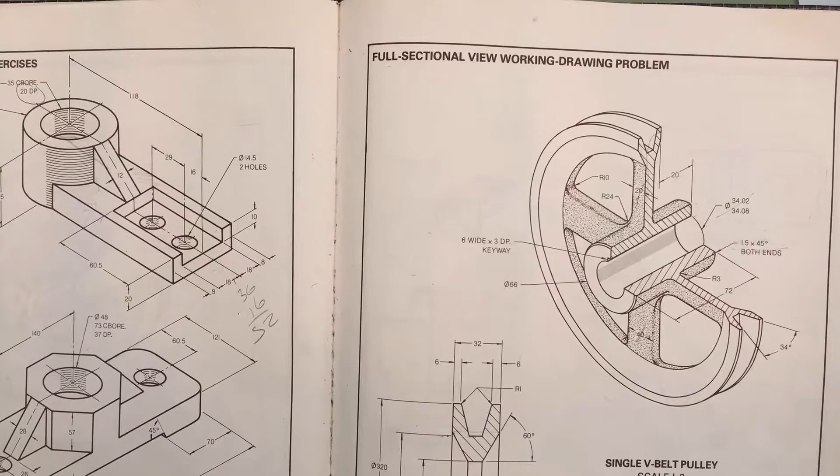So we're going to talk about the different objects that are going to be required in this next assignment, if you've got the PDF in front of you. With these, you actually just need two views for each of these four objects we're going to be looking at here. One of them I discussed this morning, the feed block on page 173. And we'll look at some of the other objects here and what has to be done with them.

Okay, so this is one that I looked at earlier with you guys, our little sketch here about what that's going to be like with the countersink and the counterbore. So that's one where we're going to be providing a top view, seen from above, so you can see this slot goes all the way down.

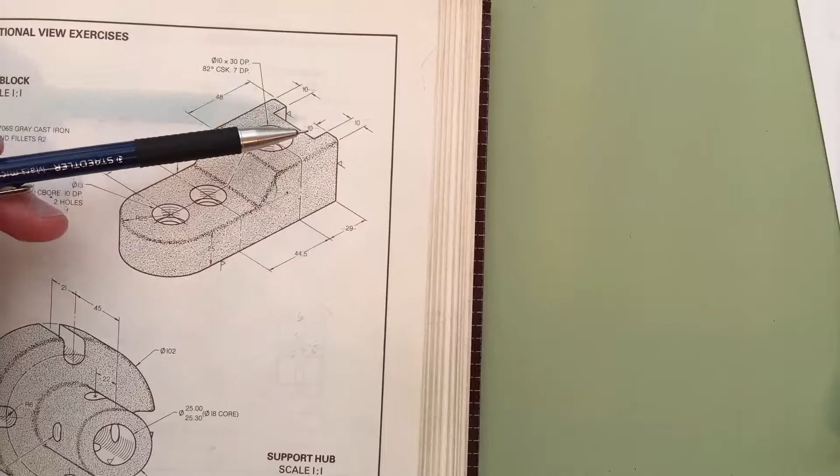And that's it. Now, some of these faces, you're going to see this funny little flag symbol. You won't have to redraw this flag symbol, but what that means is it's a finished face, like it's a polished face. It's been machined, so it's super smooth. So these things can sit right up against a very polished or well machined face, and it mates up against it without any imperfections.

So the feed block is pretty straightforward. Let's go on and look at the single pulley.

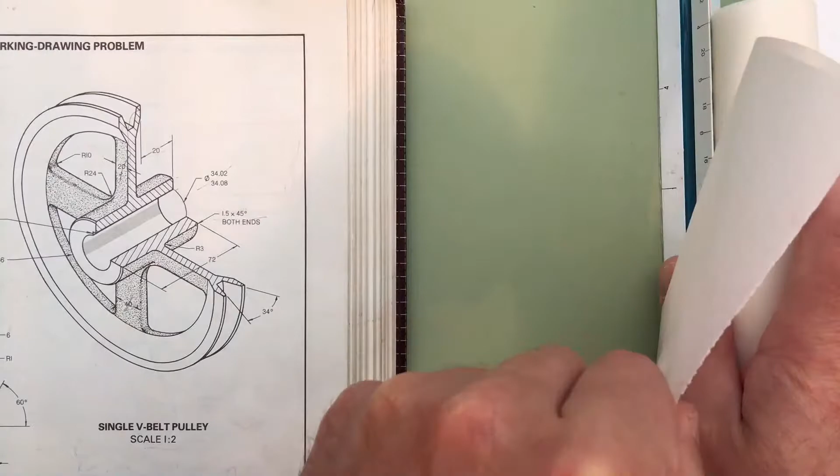Okay, so this is the one that everybody gets wrong. And remember what I said earlier about that if the students don't get it right, it's the instructor's fault. I always tell my kids, if anything goes wrong with you in life, just remember, blame your parents. It's their fault. Okay.

So this goes right back to the question we had right at the beginning of this thing. Why don't we show the spoke sectioned? So we're going to be doing a section of this thing. And that again is just so we don't give the erroneous impression from the section that the spoke is continuous all the way around. Here we've got actual, significant gaps in between the spokes.

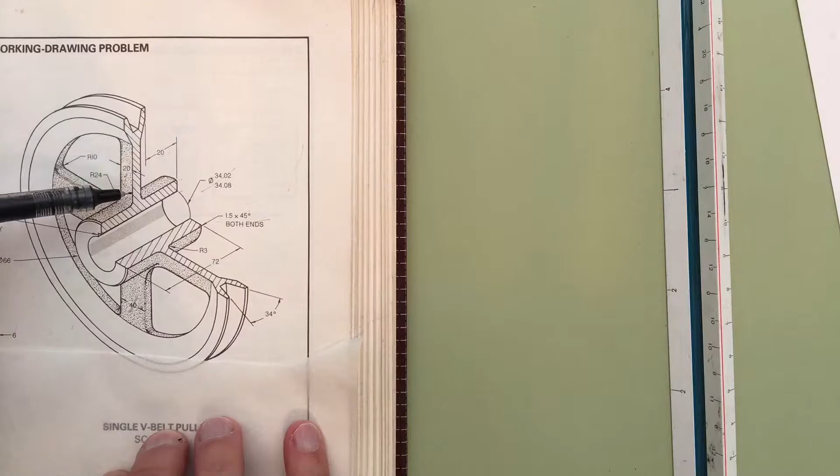So this part is going to be not shown sectioned. Now, they've got a little detail view on the end here about how this rim is to be drawn. You don't need to draw the rim detail. This is just to help you draw it when you do the section through the pulley. And we're not going to be doing this cutaway either. You're just going to do a straight section right through the middle of it.

So what that's going to look like is we're going to have the rim, and then you're going to transition to the spoke. And then you've got your hub. The hub has a keyway in it, so keep in mind that you're going to have to draw that slot for the keyway. And then we go to the other side of the hole, back to the other side, spoke on the other side.

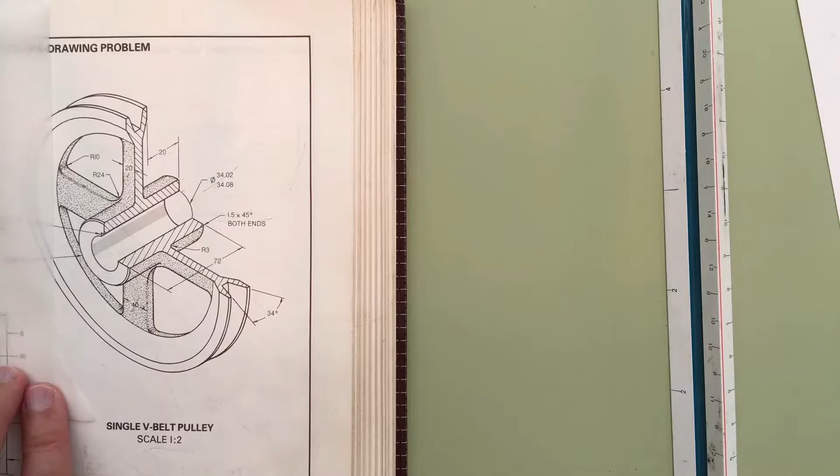Yes. Yeah, I had the Word document obscuring my live stream, so I couldn't see that I had gone off screen here. So, anyways, yeah, the point being, so you've got your keyway here, so you've got your opening.

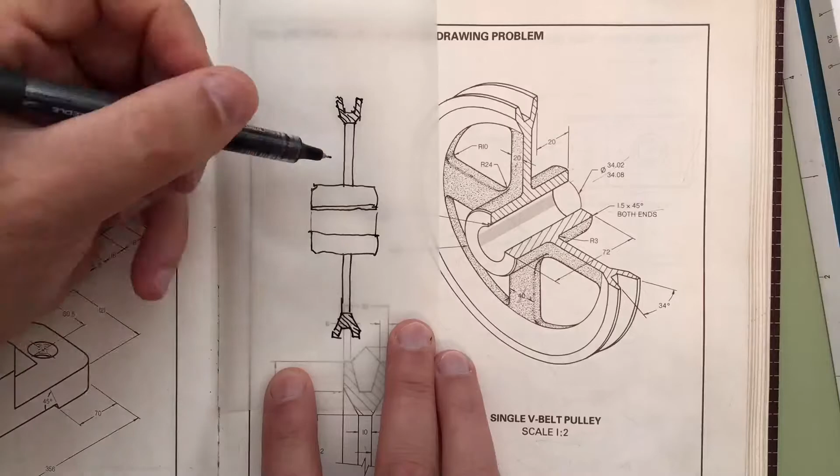And so your section through this thing is going to show the rim and the hub sectioned, but not the spokes. So in here, whatever the size of your keyway is, it's going to make the material a little bit thinner on one side of the hub compared to the other, of course. So you end up with something like this, and there's your center line that goes right through that thing.

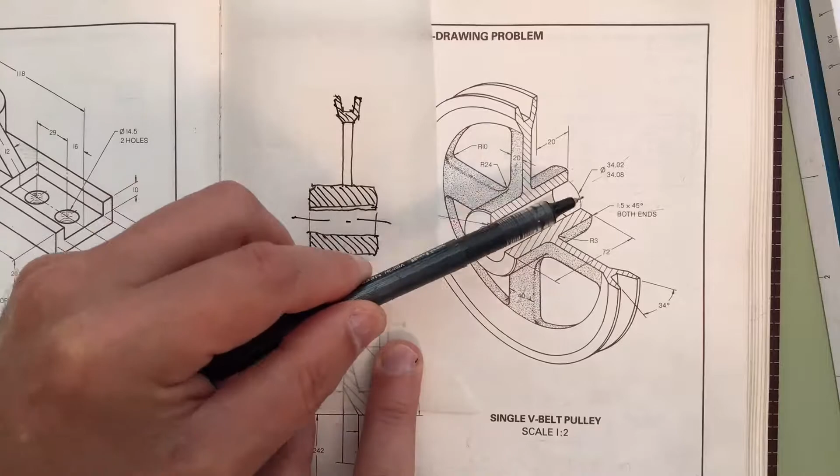Showing them but not sectioned. So again, the reason that it's not being sectioned through, even though our section line is following exactly what you see here in the cutaway view, is the convention of showing that this spoke is not continuous. Like this isn't a solid thin flange all the way around. There are holes in it, and in fact the majority of the center part of the wheel here is air, not material. So hence this representation of it. And yeah, go ahead.

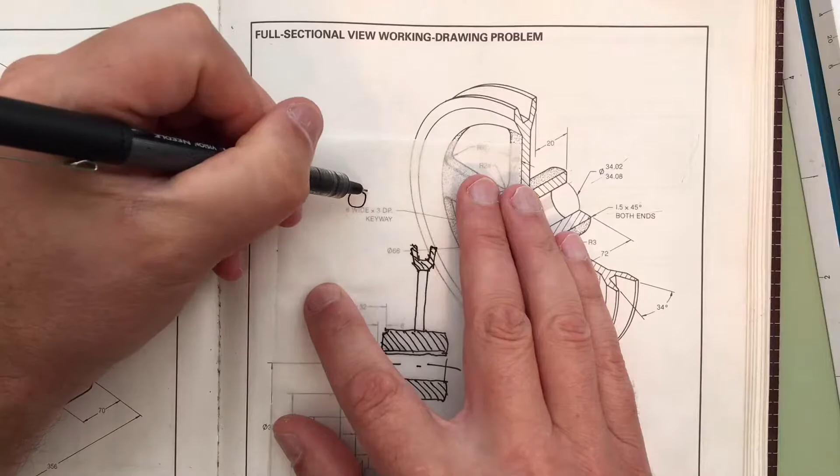Anytime there's a gap of material inside, that's the trigger right there. So unless this was a solid flange all the way around, you'd still use this convention. If you had a different situation here, let me draw a very simple top view—there's a hub and then a rim around the outside.

Even if we had small little holes, like just almost little gaps, we'd still use that same convention where we show it discontinuous, because we want to tell someone: there are some holes around this thing radially, this isn't solid material all the way around. So in a sense, your section is a lie—it's not really showing it accurately.

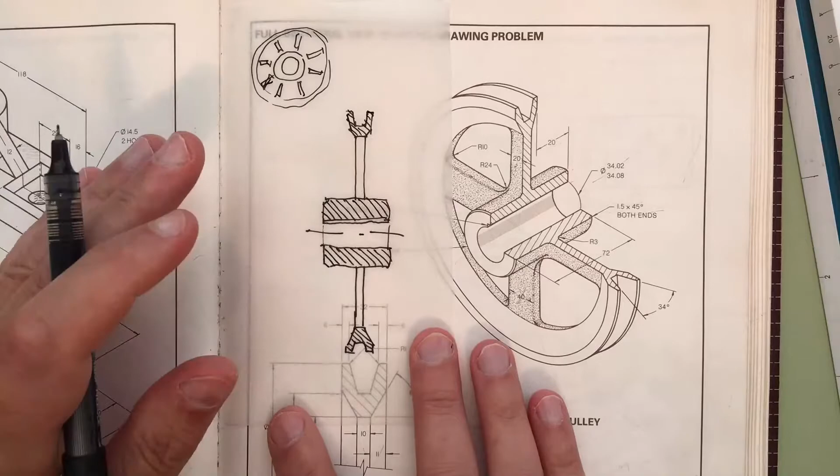It's like you went up to your parents and said, I want a motorbike. And your parent turns around and says, you'll die if you get one. No, it's a lie—well, maybe it isn't, but that's because I'm a parent, right? It's like I got a kid who wants a motorbike really bad. He's like, I want to start with a 600cc bike. And I'm like, you're going to die, dude. You are going to die.

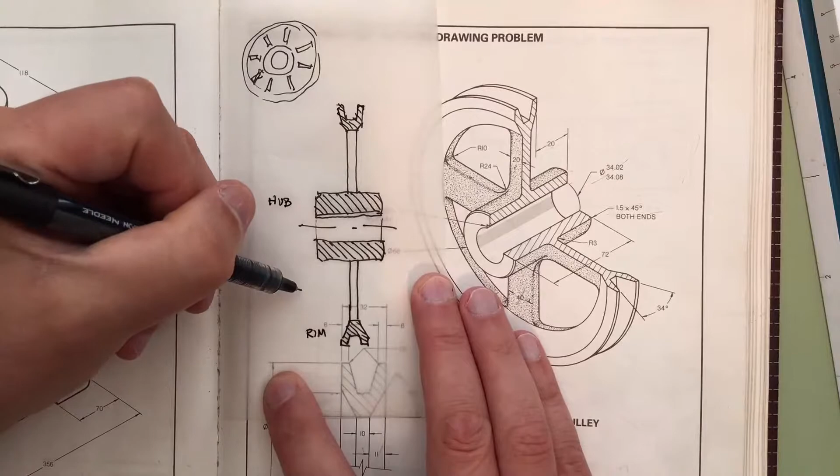We do this because we're trying to get clarity on this thing, which is that this piece of material between the rim and the hub, the spoke or web that's in between, is not solid material all the way around.

Anytime there's a bit of a gap—and it's a bit of a call—but most people sectioning through this, even through a wheel like this where you can see 80% of the spoke area is solid, it's only like 10-20% of the spoke area that's air, but nonetheless we'd still use the same presentation. It's designed to say this is a weaker or background thing—it's discontinuous, but this is continuous.

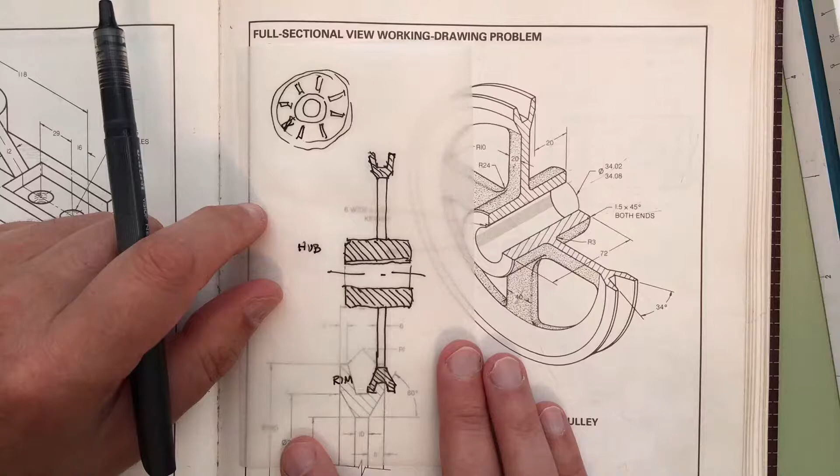Like this thing here. I didn't maybe draw this quite correctly—if you were looking at it, there's a bit of a round here, or a fillet, I should say. It actually does this, and you would not see those bits of lines coming right down to the end. So when you guys draw this, you can see what you'd see. Let me draw that again: the spoke comes down, and when it hits the hub, it's going to round out, it's going to flare, and that's what you're going to see.

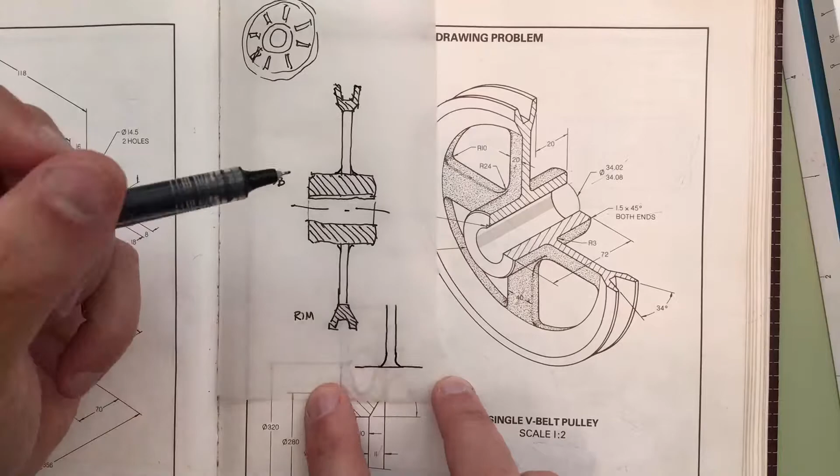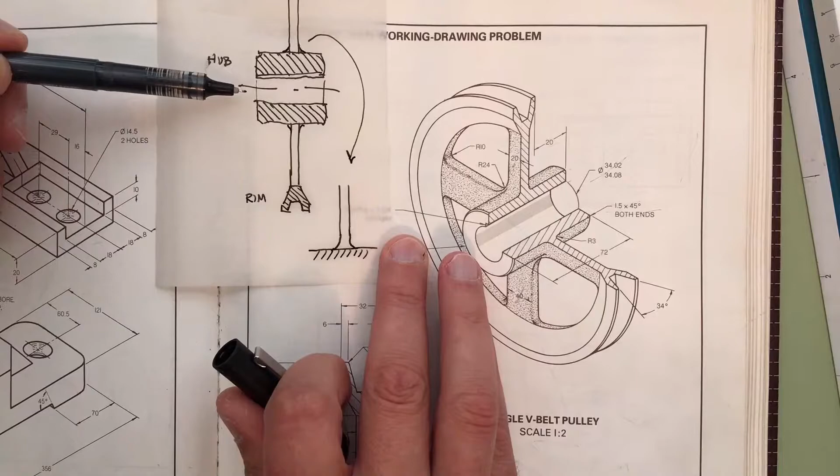And then sectioned material below that—that's this location here, which I'm drawing right there. That's right—solid material and not solid material, right? So that's the idea, so that when someone's viewing this drawing: from the edge of the hub to the edge of the rim, that's where the rim ends, and that's continuous all the way around. And this is the edge of the hub, which is continuous for 360 degrees. But in this zone between the hub and the rim, this is not continuous material, it's discontinuous material.

So here you have a discontinuity between this spoke and the next one because there are some gaps in the material. Now, some other stuff to talk about here—this isn't something in a textbook, but it's a tolerance.

This is something you'd still put into your notes. Here we've got a hole going through the hub, and this hole can be anywhere from 34.02 millimeters to 34.08 millimeters. Now what are you going to draw? Well, just draw 34, because there's no way anybody can see the difference between 34.02 and 34.08 anyway.

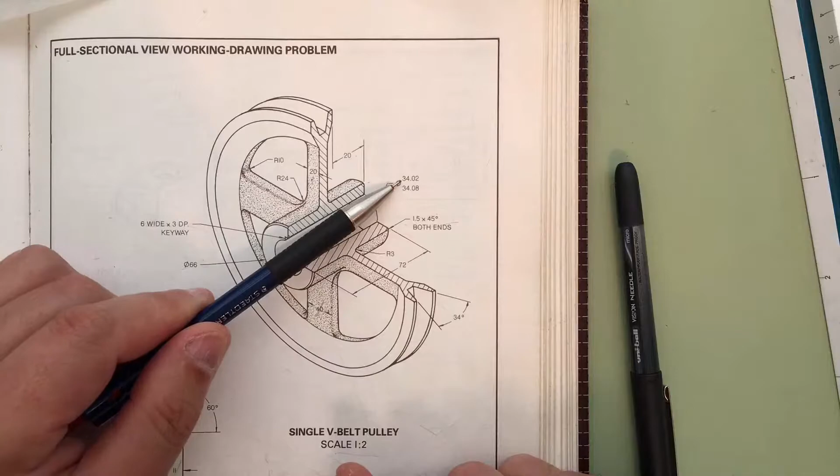So in real life, yeah, it's a tolerance. When these people are drilling this hole through, you want to make sure the 34 millimeter shaft can slide through without getting jammed. So the hole's got to be at least 34.02 so you can get the shaft through it. But if it's any larger than 34.08, it's going to be wobbly—it'll rattle inside because the hole's too big. So this tolerance, when you see two numbers like this, it just means make it anywhere from that size to that size, and somebody's got the machining to deal with that. So that's a tolerance.

So just draw it at 34 and then put these in your notes with the leader and with a little diameter symbol on it. Stack the numbers like you see here.

Now what we have on this thing is we have some rounds, and here we've got some fillets, an R3 fillet right here between the spoke and the hub.

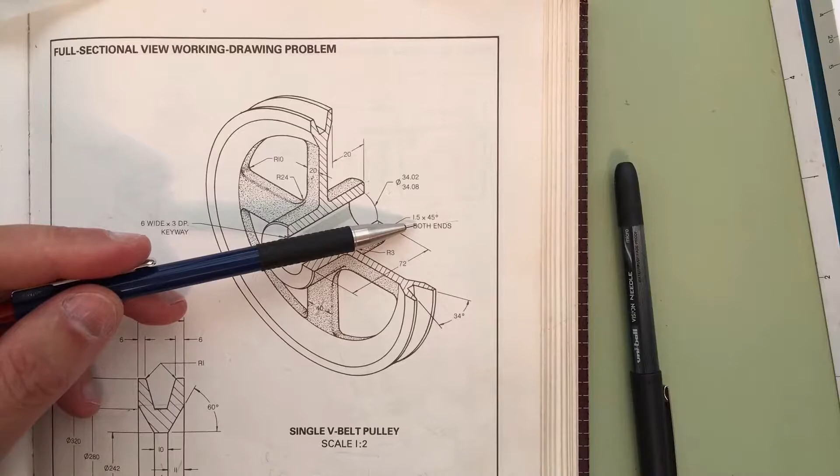But then we have what's called a chamfer. Here on the edge of the hub, I'll just draw this here at a larger scale. So a chamfer is where they grind off a flat face on the hub. Sectioned here, this is what it's going to be. That's our material.

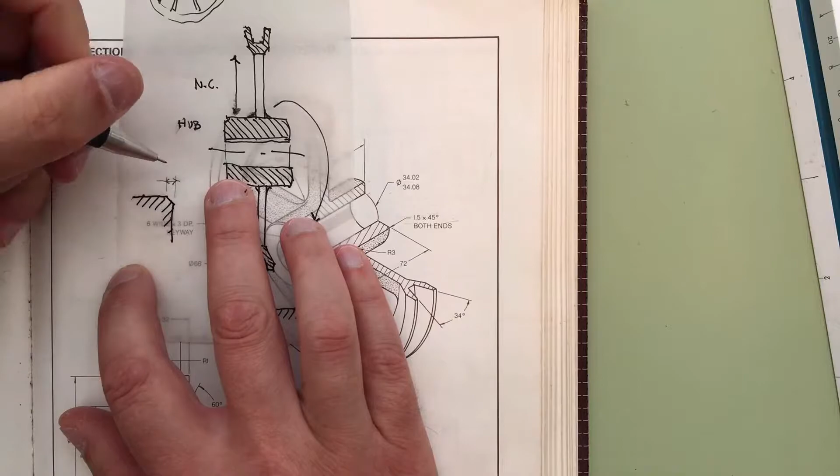When it says 1.5 by 45 degrees, it means the distance from the face of the object back to where the chamfer ends. So that distance right there is 1.5 millimeters, and it's 1.5 millimeters in both directions because it's a 45-degree angle. That is known as a chamfer. You won't have to note it as a chamfer—everybody in industry knows what it is, so no worries there.

Now here, where we have our spoke meeting the hub, this thing right here has a radius of 3.

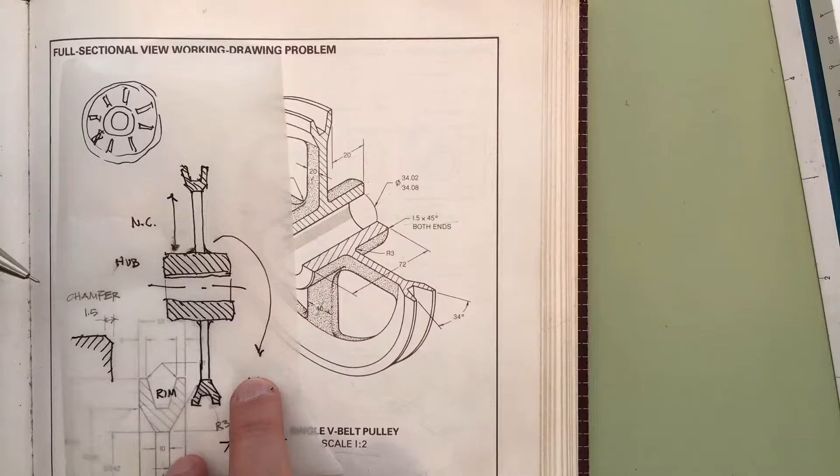This is a peril of being left-handed—you're always dragging your hand over your work and smudging it all the time. Yeah, it's a bit of a drag. So all you righties out there, thank the gods above that you are right-handed, because it can get to be a bit of a mess.

Okay, so that's that one. Just remember again that the spokes aren't continuous, and then you'll largely be on your way. Now the next ones are actually fairly straightforward.

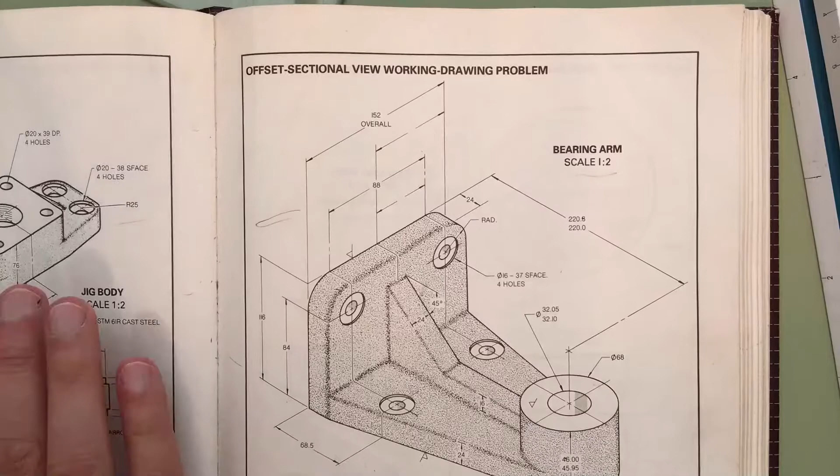They're sections now, so we'll talk about these, and we kind of hinted at some of the techniques or methodologies we're supposed to use. You can see someone here has already been sketching up the jog in a section. There's some other sketching going on here.

Okay, so it's the fixture frame. If there's a difference between a scale on the assignment and a scale in the textbook, use the scale in the assignment, because sometimes the scale in the assignment is different since we know it's not going to fit on a sheet as easily.

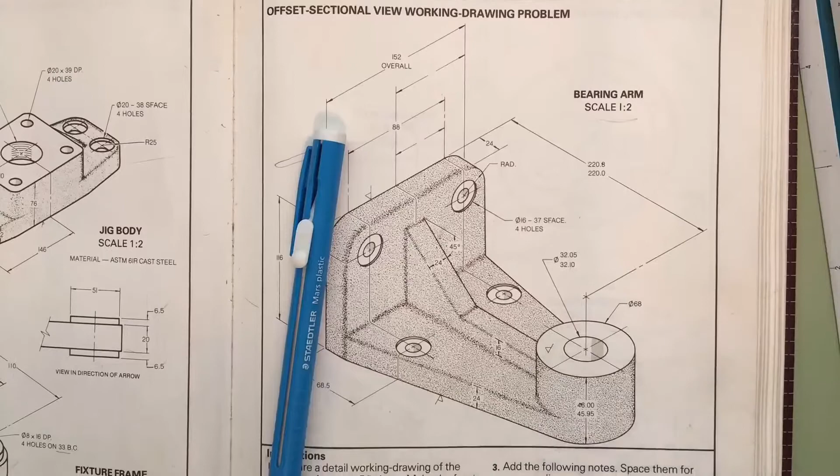Okay, so with this one here, we'll just talk about the strategy. It's just a top view and a section view, but there's some trickiness to this—it's tricksy, if you're a Gollum fan. Tricksy little hobbitses.

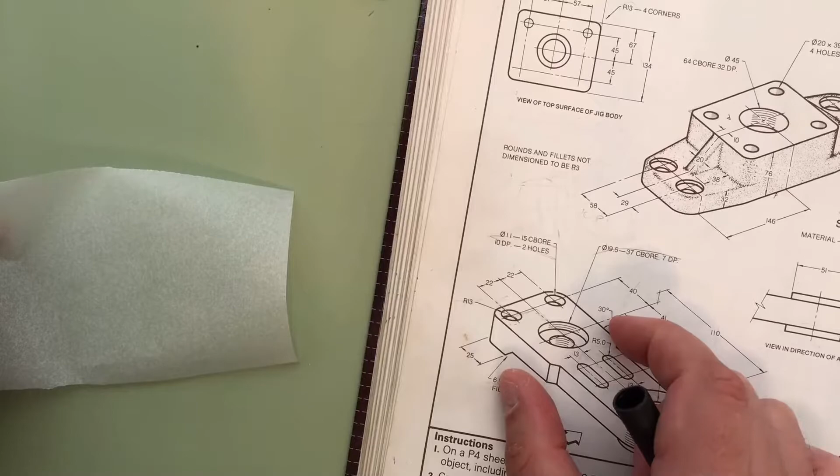Okay, so when we draw this fixture frame from above, you've got the radius here, and we've got some shoulders, but you will have to engineer what the full width of this is by doing the math. So we've got 44 mils between the center of these two holes, and then we've got a radius of 13, and you can see the arrow here.

Let me just get that up close to the camera so we can talk about it. The R13 down here in the corner—you can see how that arrow... Shoot, I just dropped my tracing paper and it unrolled all over the deck. Womp womp. So there, R13, it's pointing to the very ultimate outside of the object.

So that means we've got 13 mils added on both sides, so it's 26—2 times 13, 26 plus 44. So I think that's 70. 70 wide for that piece right there.

Okay, I'm just going to get that trace paper and roll it all up again here as I'm talking to you guys. So yeah, it makes sense to do the top view first, and then we'll come back and do the section view. So here I just got to use that drafting table to roll this stuff back up again.

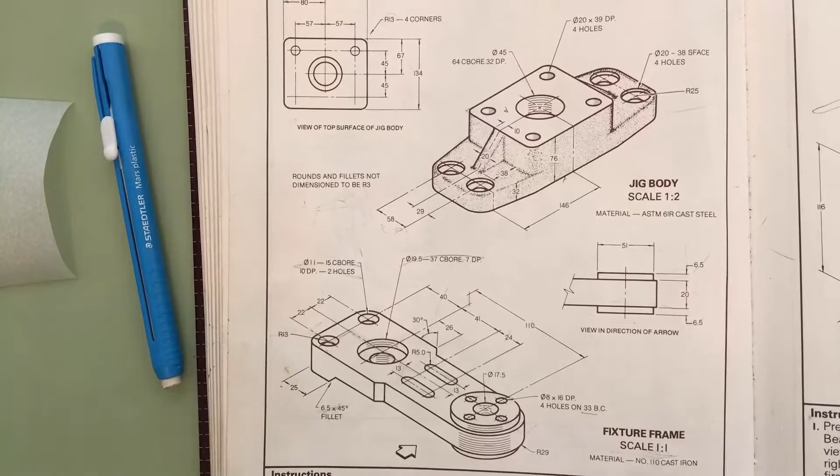Just trying to think if there's anything tricky about the top view. It's actually not the top view that's too difficult about this one—it's entirely the section. Oh yes, yeah, this is going to be a jogged section.

Oh no, guys! This isn't accounting. This is fun.

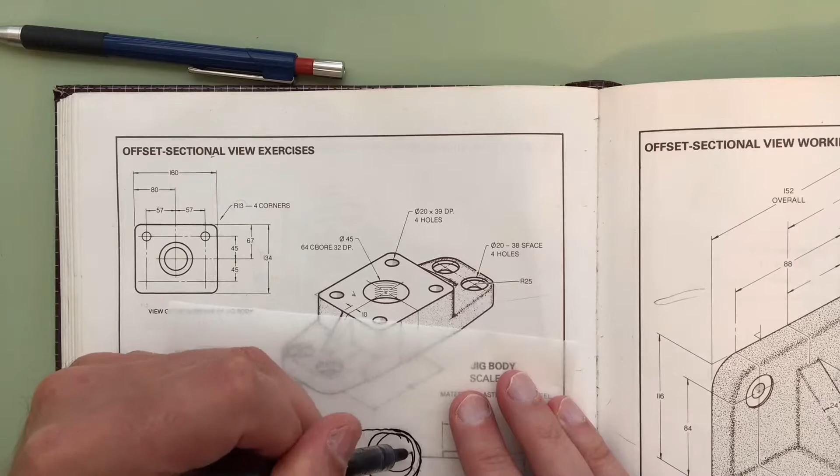Okay, let's do a quick top view sketch here so we can talk about the shape of this thing and how we will section it. I've got this completely wrong. So there's a second hole at the top, a hole in the middle, holes around the sides, and we've got the slot. Yeah, this is getting a bit of a cluster here.

So the section line is going to jog a bunch, but in the end this actually isn't going to be that serious a drafting exercise when we cut through it in section. I'm just looking for my colored pen so I can talk about the section line. I'll do it in red so it's easier to see.

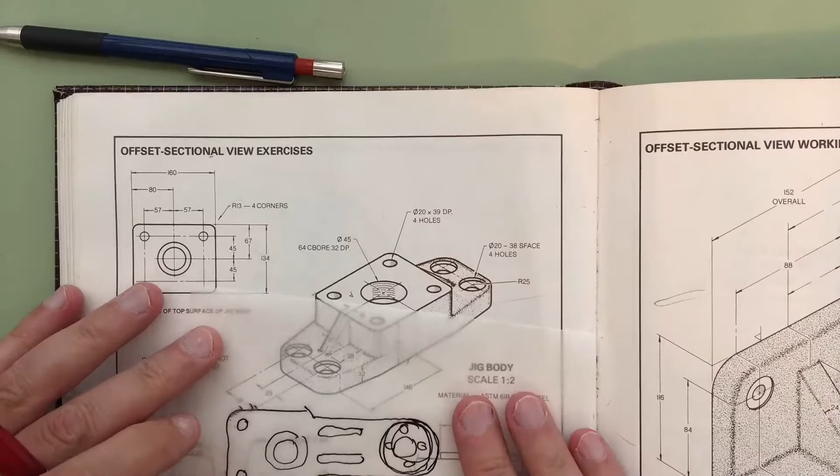So what's the section on this one going to do? What's the best way to go through the right end of this thing? Well, we'll just start in the middle and go right through the middle of this hole. So that's step one, pretty straightforward.

Now we want to catch one of these slots. It doesn't matter whether you go forwards or backwards, you just make sure you're looking in the same direction all the time. So I'm going to come back and go through this slot.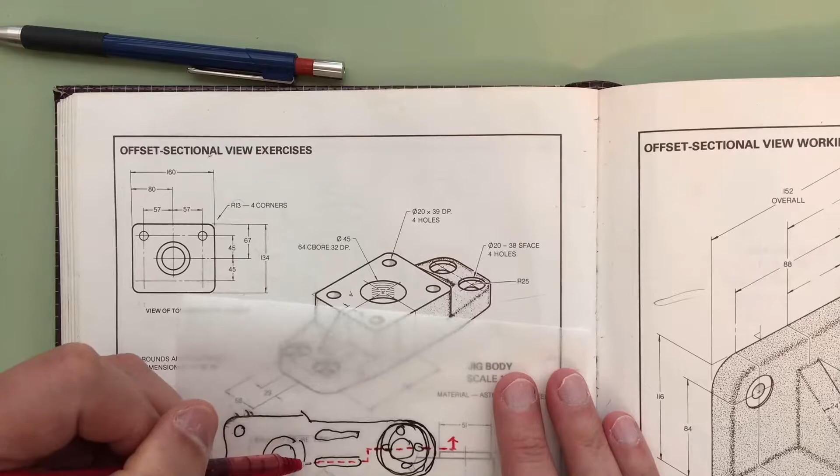Now when I get on the other side, I'm going to jog back over, go through the center of the hole, come back out, and go through the center of that hole. And that's the way we're going to draw the section. Now that looks torturous, but it's actually not that big a deal.

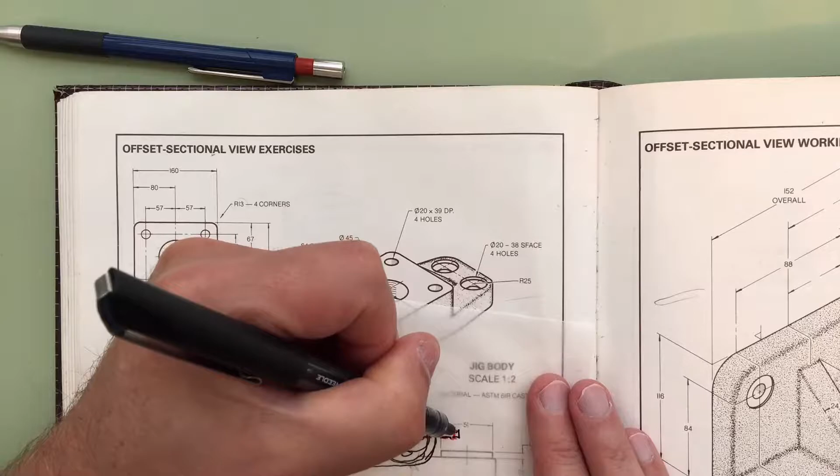Now for drawing the actual section line that's going to be on this thing, what would you do? Well, to be honest, I wouldn't draw this crazy section line, I wouldn't even bother with that. At the very least you would show that you're going through the section, or the middle of the object here, and then at the other end, when you come out the other side, that would be really considered sufficient. You wouldn't have to put any of that red business or anything else in the section line in there.

When the fabricator looks at your section and sees a hole here, a hole here, and a hole here, they're going to be like, yeah okay, I see what you did there. And that'll be totally good enough.

So let's look at the section. Here you can see this jogs downwards just at the very end here. And then this thing where the circle, the inner circle, raises up, it's proud of this plate above and below.

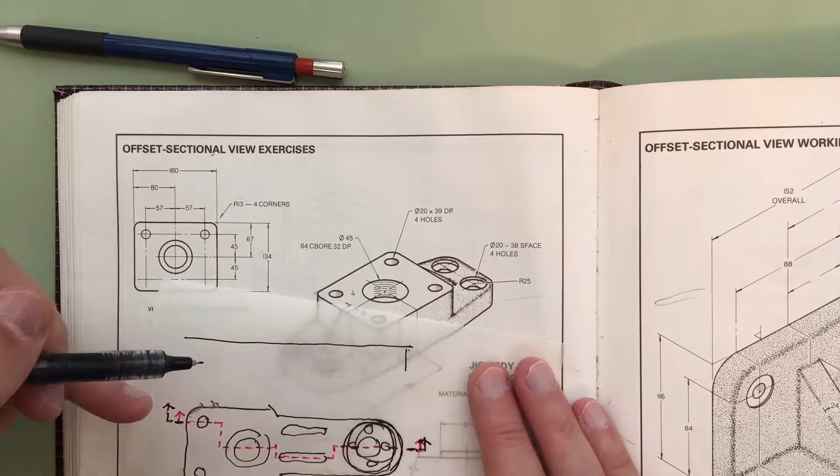Okay, so then we've got the little piece of the circle above and below.

Now I'll have another nice picture of this thing for you guys, which I'll stick in the ADT1 channel, so you'll be able to see all that. You can kind of see how this thing is built here, and so there's my resulting section that's going to be through it.

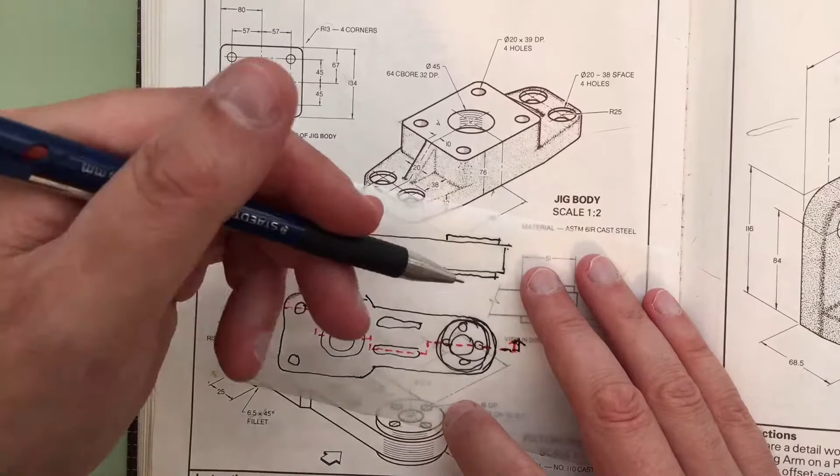So now we've got to talk about what am I going to show sectioned. What's happening here? Now this has almost kind of been drawn as a bit of a front view, so there's a couple of minor errors in it. So first of all, here we're going to transfer our slot up, and that's going to be drawn right through.

So in this one we've got our big hole in the middle, and then the two holes in the sides. So that hole goes all the way through. And I think these ones here, they're only 16 deep, so they don't go through. This one says diameter 17.5, and this center hole goes all the way through, but these four smaller ones do not. So you're going to see something, I don't know if I've got this quite right.

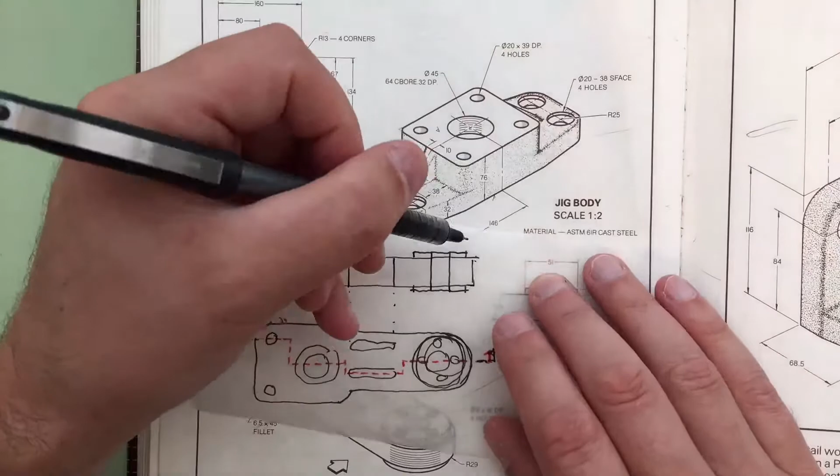Right, so these holes don't go through. Now this line that you see, I accidentally drew that as going through. It's not, so I'll fix that when I start doing my section line. And because I did it in ink, I can't erase this little piece of line right here under my pen, because that shouldn't be there.

Okay, coming back down, we've got our big spot face here. Not a spot face, probably a counterbore, 7 deep. And then we've got a hole that's 19.5. So that hole here goes all the way through and then steps back on each side. There's going to be something like that.

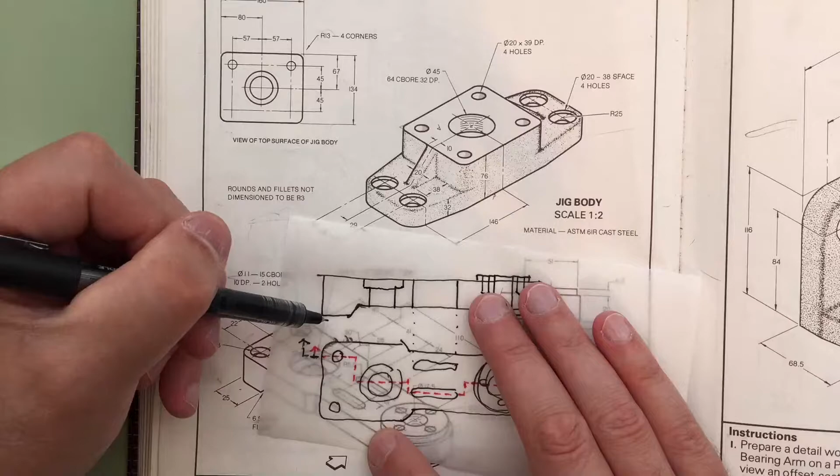And of course you see the object line going across. Then we're cutting through for a hole here, so it's got a counterbore 15 deep. And then diameter 11, 10 deep, 2 holes.

Counterbore 15 - oh I see, the counterbore is 10 deep, and there's 2 holes with a diameter of 11. So the hole goes all the way down, and then there is a 15 counterbore that's 10 deep, and the 2 holes are 11 diameter.

Sometimes the wording up here makes you wonder what's going on, but the counterbore has a depth, and the diameter is for the hole. So you've got two holes that are 11 diameter.

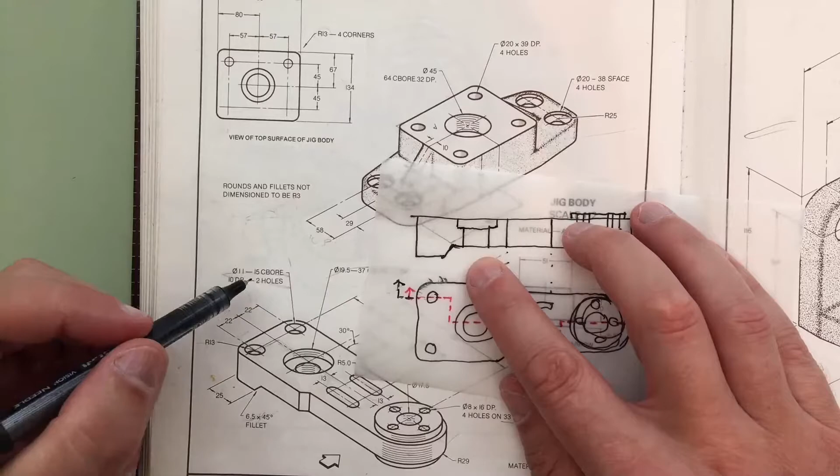I think sometimes they put the information here in a sort of backwards order on purpose so that you have to think about what's going on. So there's our hole, 15 wide, something like that. Don't forget the object line for the counterbore - you'll need that as well. So we're kind of sorted here.

So now I can start sectioning this. Now the next part of this that's going to be tricky is talking about the center lines.

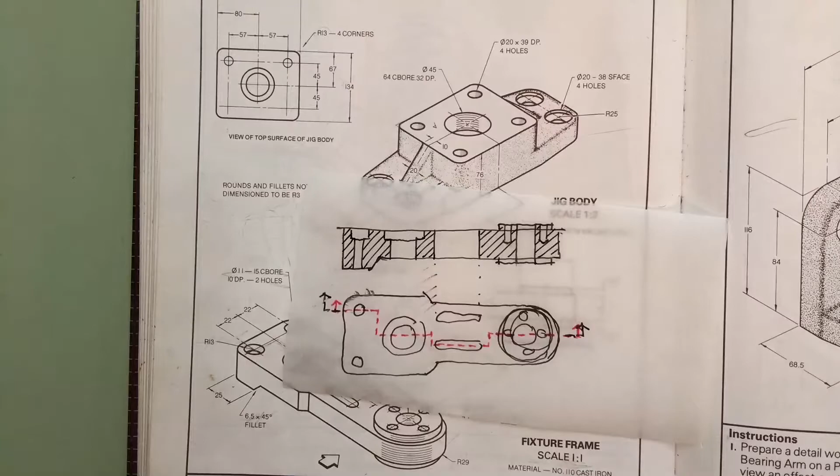These slots have half circles at the ends, so the slots end in a drilled hole. Typically when machining something like this, they'll drill the holes first, then use a router bit that will zip out all the material between those two holes, and that's how they create that slot. So when we're showing the slot in plan, it's going to have a series of center lines that get created.

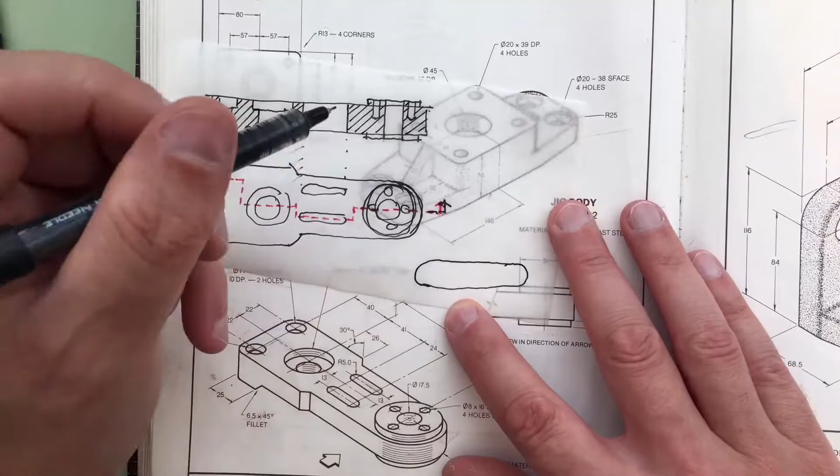I'm going to draw this a little bit larger because it's kind of small and messy. So there's my slot - this isn't really much better. I'm just blowing on it to dry it off as quickly as I can. We've got our center line for the holes that were at each end.

So we want to see a center line there vertically. This is a circular shape all the way around, so we really want to have center lines in the other quadrant as well. So we'd get my center line doing something like that. In the top view, you're going to see this slot with a center line running down the middle, and then a center line at the center of the hole on each end of the slot.

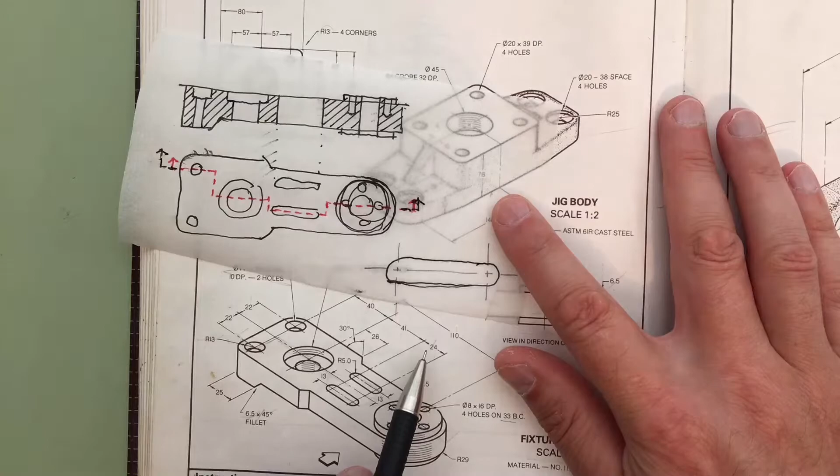Those numbers are dimensioned. Now when you're drawing this in section, these center lines that were here at the end of the slot will project upwards, and you'll see them in the section.

Well, what about this horizontal center line that goes through the middle of the slot? Will we see that in the section? No - we'll only see any of these center lines that can be projected upwards. And if possible, try to make it so that the dashes for the center lines line up. Not always possible, but you do what you can.

Now when we're cutting the section through here, there is a hole in the background, right? So we will need to see the hidden line for this hole here shown in the section. Yes.

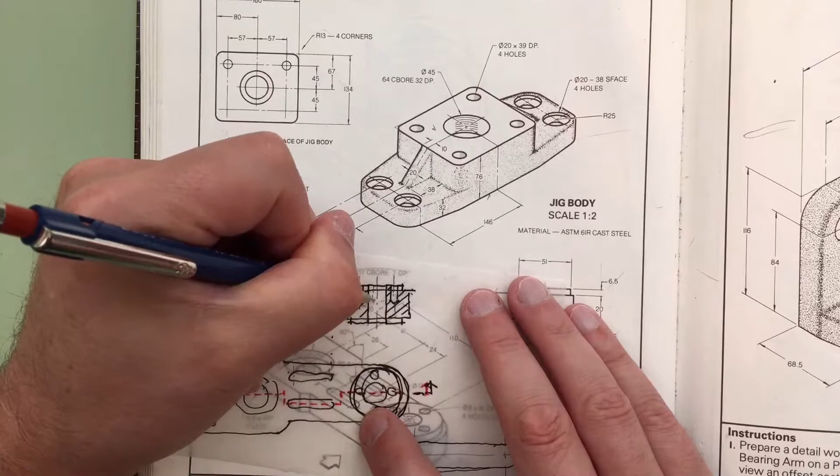Well then what about our major hole? Then you'd end up skipping the major hole - that would be the problem. So yeah, no, that's right. I mean, you're kind of damned if you do, damned if you don't here.

So the question was - this is just for the YouTube stream - why can't I take my section line, jog it here, come up and pick up this small hole? Because then you'd be forgetting the larger hole. So in this case, we keep the section line following the most significant bits of the geometry, and keep working our way across.

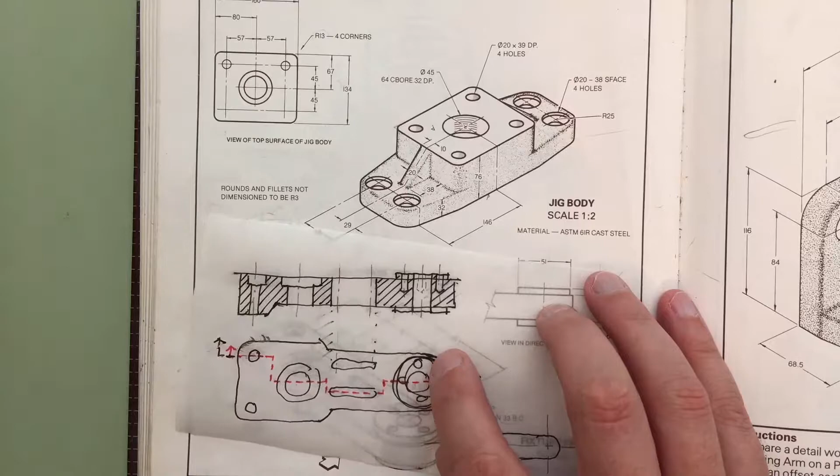So this is the tricky one. These center lines here coming up from the ends of the slot, center of holes, those are important. And then a hidden line for this recessed hole here. And so, I goofed up on this line - it shouldn't be here, this horizontal little piece. This should just all be one continuous bit of sectioned area there.

Object line going across. I'll put my red lines on there, and I'll continue with the sectioning here.

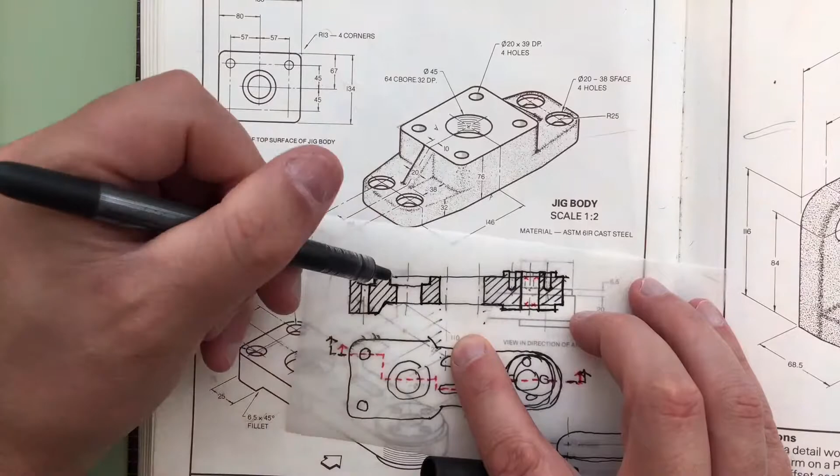In mechanical drawing, we don't show an extra heavy line for the sectioned area versus background lines. But as you're planning it out, this material hatch line would come down here like that. That is what your section should appear like.

So that just kind of walks you through this one. And we're cutting right through the middle of this thing.

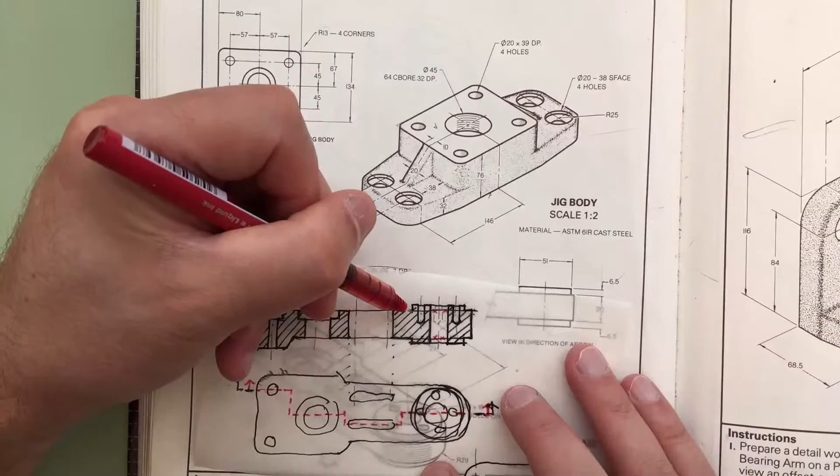This material steps up to that raised part in the middle. Would we see a hidden line in the background? We actually would. Going across here, this wouldn't be a solid line, it would be a hidden line from here to here, so you'd see a dashed line going across on each side. Not super critical if it's not there, the top view certainly illustrates what's going on.

Okay, I just got to go back and look at the assignment here and look at the next one. So, 183.

Okay, so the piece de resistance. This is a situation where you're going to be drawing a top view and the section. So the main thing that you want to make sure that you get correct on this assignment.

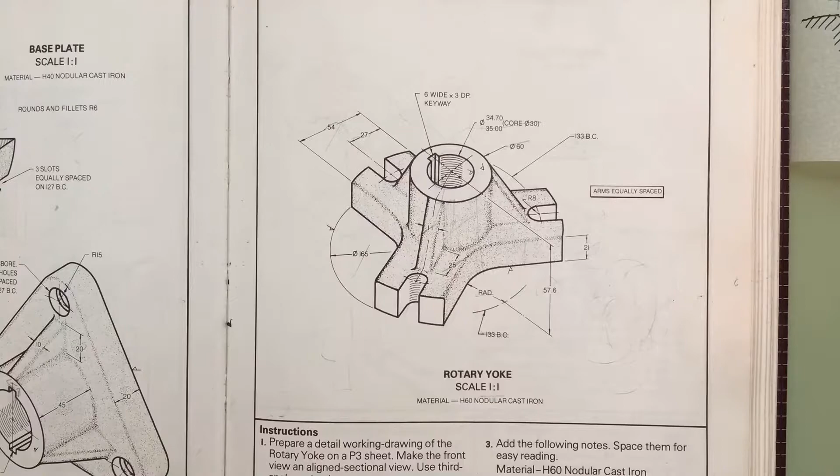So if I lay this out in plan, I'll just draw it very simplistically. Don't forget you've got your keyway here, or your key for the shaft. So I will draw that in here and make sure that that key is at the top of the view.

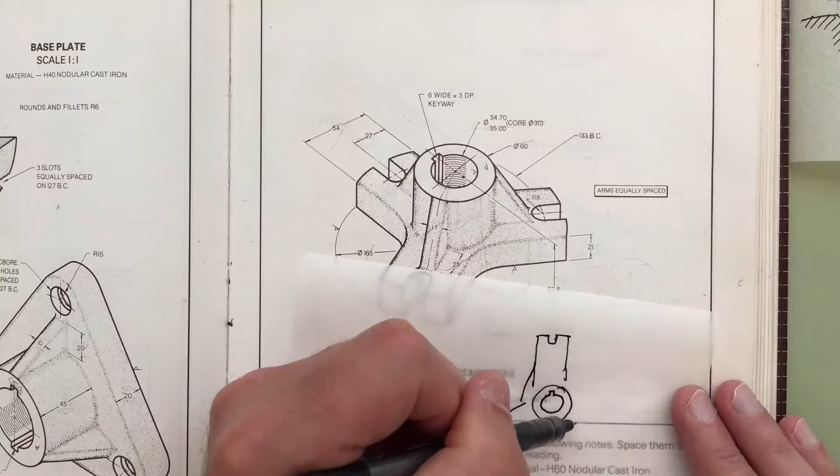Oh, it comes in closer. Okay, this is going to be a mess. Like, I mean, really a mess. Like, I should go back to kindergarten.

Okay, mostly what we're just talking about here is the sectioning strategy. So when we're talking about the section, we've got our keyway pointing up. So that's important, and our section is going to come right down this axis.

So I'm going to draw where we're actually going to draw the section line using the red ink. And it doesn't actually matter which direction you choose to cut the section in, but you just need to be consistent when you show the graphic for the section when you go down one of the other arms.

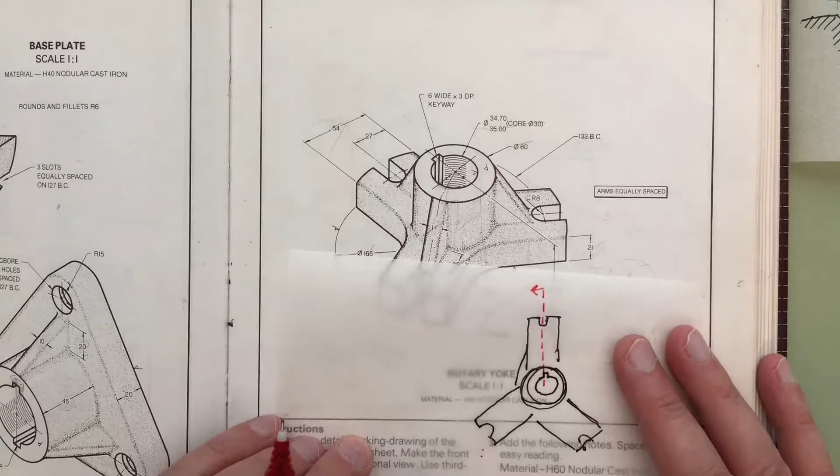Now, it doesn't even matter which arm you choose next. So if we decide that we want to look to the left with the section, well, you can come down the left arm or the right arm. All that matters is that whichever direction you choose to go, you make your section arrow point in the same direction.

So you want to go down the right one, fine. But if you want to go down the left one, that's fine too. But you just make sure that the arrow that you show at the end points in the same direction, whichever way you go.

Now, when you actually get to drawing this thing and showing where the section is, so I'm drawing that in black now, don't draw that section line going down the object itself. We don't want to hide anything. So just draw that section line outside, and that's good enough. So just make sure that your direction of your view is consistent.

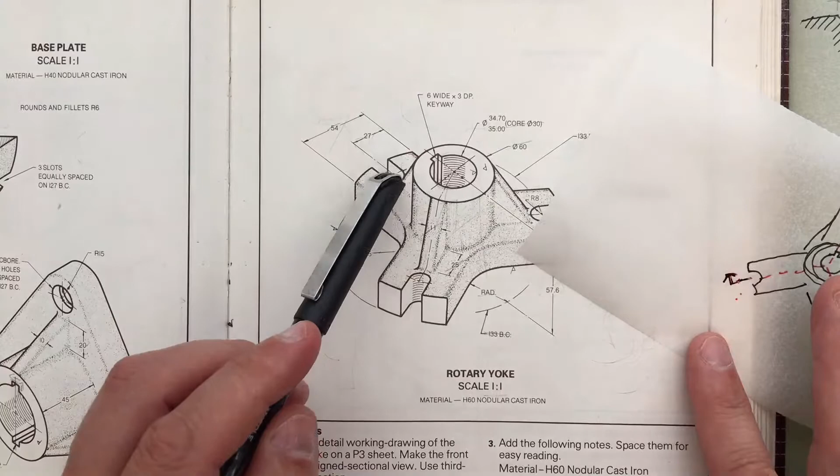So with this section, what's going to happen when we look at it is we're going to be cutting through the slot. So when we draw the section, make sure that your hub points towards the top view. So if I was looking in this direction, I'm looking at my section.

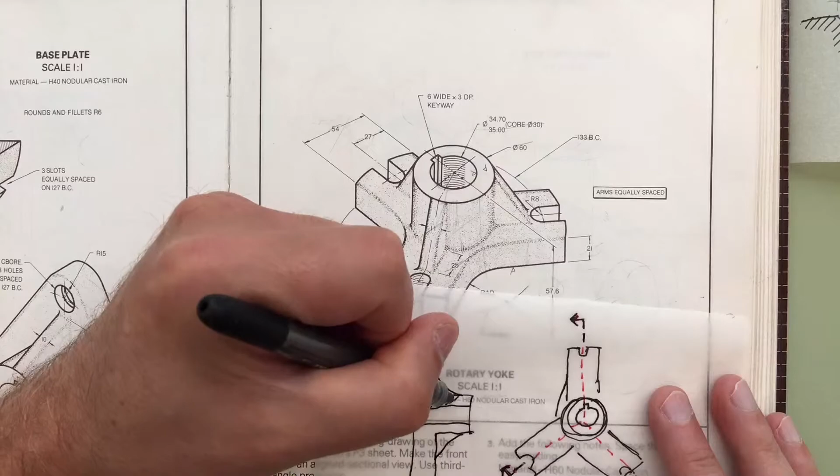Actually, no, this is actually going to be a really good learning point here. There's actually something wrong with this whole layout. Does anyone feel that disturbance in the force? What has the instructor done wrong? There is a mistake here. Now, is it in the section or is it in the top view? There is a mistake, it's a pretty straightforward one. It's actually...

No, it's not in the webbing actually. It's in... Well, this would give it away.

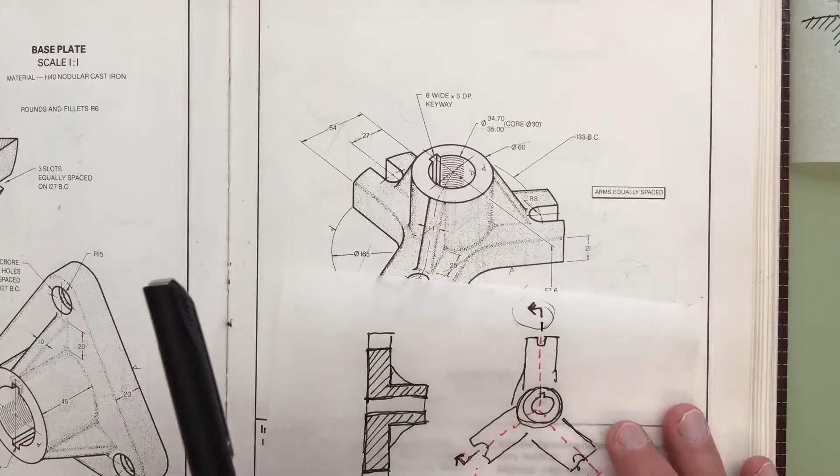No, it's more about the directionality of how I'm showing the section on the top view. They're pointing the wrong way. Yes, exactly. So if I've got my section view here, the section is actually looking in the opposite direction, because if you're really drawing this the way that I'm shown, I should have mirrored this so that the hub is pointing in the opposite direction. So really, this just needs to be mirrored and drawn in the opposite direction, like this.

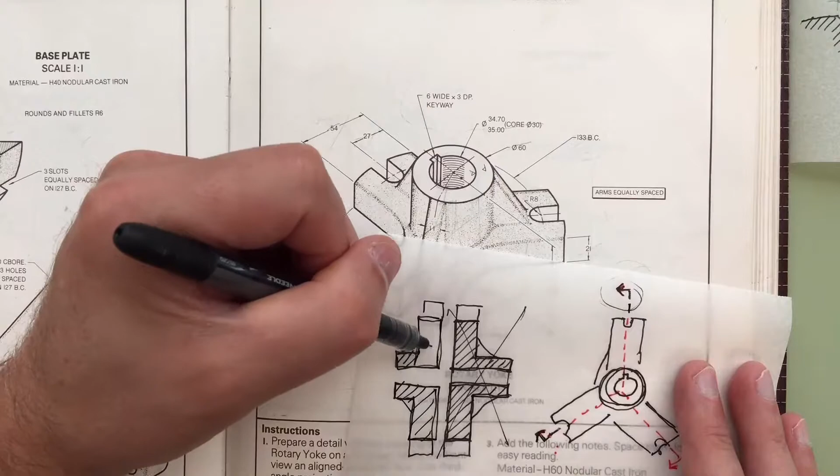But the problem with this is that we've got the other problem with the convention, which is that the hub in the section is pointing away from the top view.

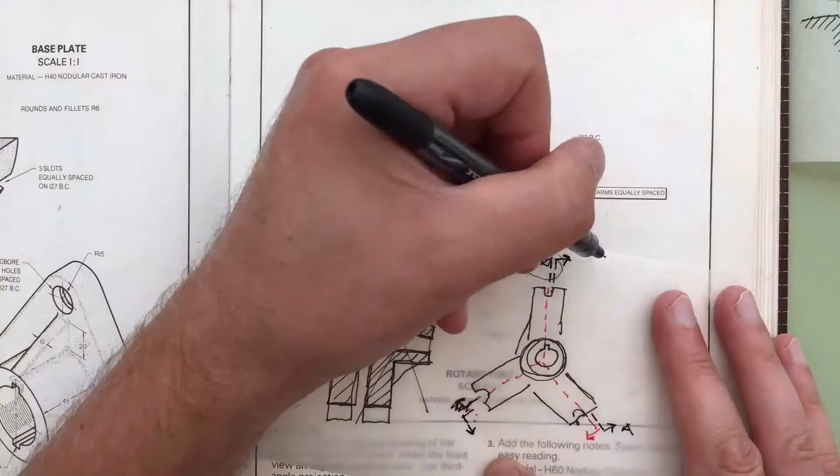So what should I have done here? I could have taken this view exactly. The best way to do this would have been to have this view, so in reality this is correct, and this would be wrong. We'd switch the arrows around, draw that section arrow looking the other way. I could switch the arrow here, do it there, or do it over here. Any one of these could draw the section, and then my hub in my section would be pointing towards my other view, which would actually be preferred.

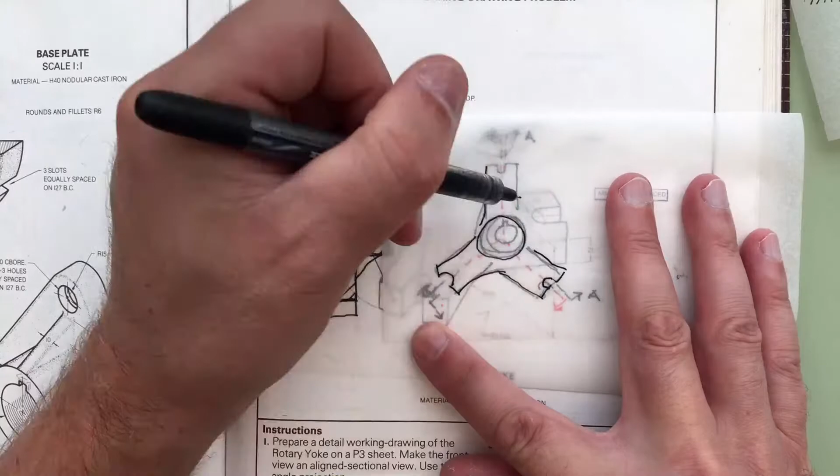Now the other correct way to set up your page here would be to have the top view of this thing. It's even nice to have the previous sketch that I had under there before, so I can work out some corrections as I go. You can see just why trace paper is so awesome, because you can see the previous stuff you did before and the mistakes you made, and then come back and sort it out. Just make those corrections as you're drawing through the trace paper. I love trace paper, I wish life was trace paper.

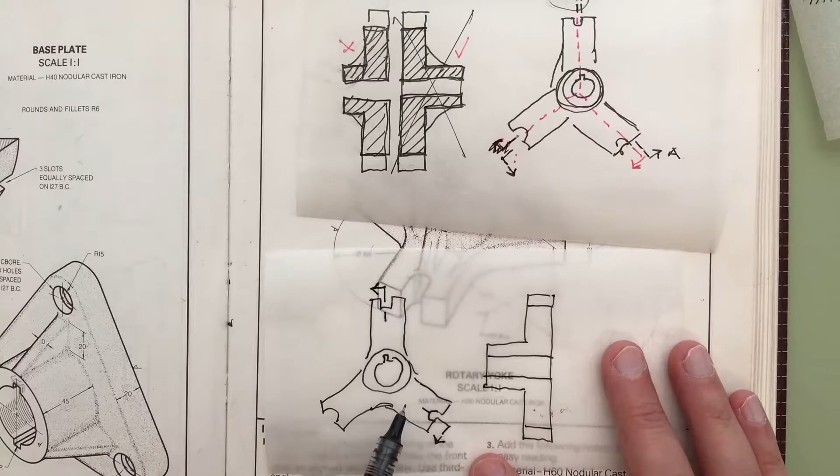Okay, so now my section is on the right hand side. This is good, the hub is pointing towards my top view, so that is preferred. So now what I do with my section is make sure it points in a logical direction, looking in the same direction as the section itself. So this is also correct. You could do it either way, but you just have to put the top view in the right place, and it's all about which direction you draw the center line in.

So if you do your top view and your section view and you're thinking, is that going to affect me? Don't worry about it. Just make sure your section lines are pointing in the right direction, and then away you go.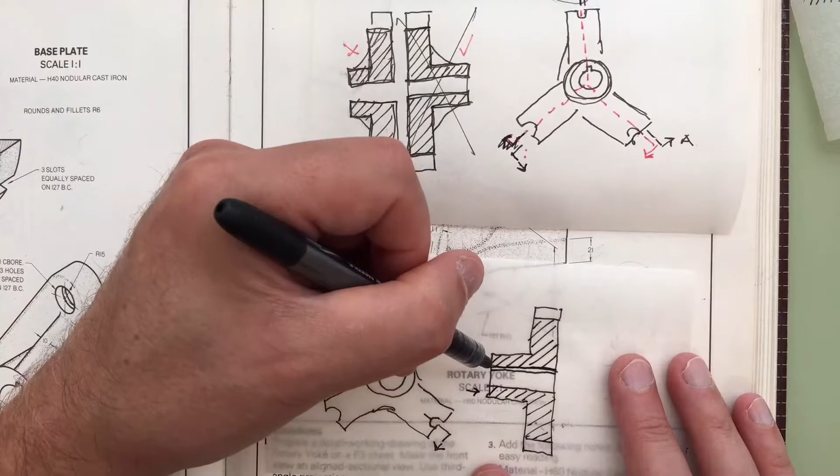So now the other thing to keep in mind is you want to make sure your keyway is at the top, so always show the slot for it in the section. Of course the keyway itself is not sectioned, so the sectioning of the material comes right up to the edge of the keyway and begins there. So the hatching on the side without the keyway is going to be a bit wider than the hatching on the other side with the keyway. That's just going to affect how the sectioning goes.

Okay, so that's it. That's kind of how this whole assignment is going to break down.

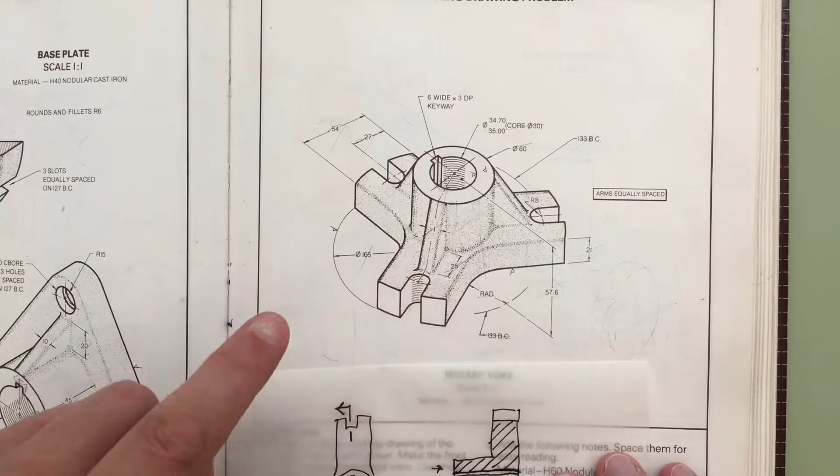Well, yes, you would. No, hold on, no you wouldn't. The reason is that you're cutting right through the center of it. If there were some holes around here, there would be some hidden lines involved. But here you're cutting right through the middle of it, so the only thing you're going to see, because these things are on a curve, is a bolt circle here. As you go around, does it say bolt circle anywhere? Yeah, right there, 133 bolt circle.

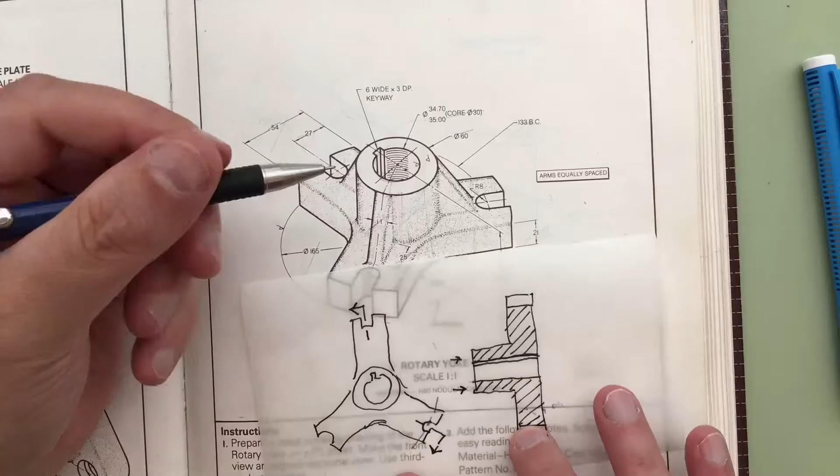Now the bolt circle doesn't even need to be continuous, so you can draw a piece of it. In the white space around the edges here, just make sure it's the same radius, obviously. So there's my bolt circle there, and another piece of it up here, so my bolt circle is indicated all the way around. Do a little center line that comes out and get that nice plus happening where the two intersect.

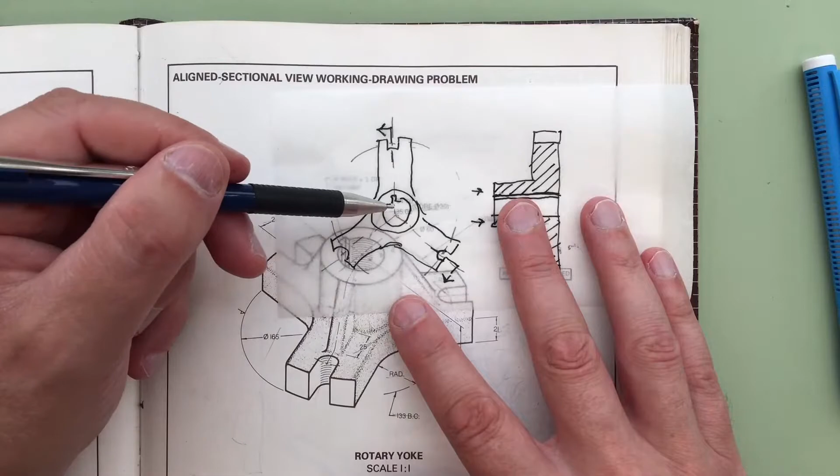Then in the center here, they've shown the different center lines at 90 degrees. I think I would probably just stick to 120 degrees, just because it's confusing. I sometimes see mechanical drawings where the hub, even on a 3-spoked item, has horizontal center lines at 90 degrees, and I think that's confusing, because if there are no holes or anything to warrant that center line at 90 degrees, this is not organized by 90 degrees, it's organized by 120. So that's just confusing.

Now, yes, the webs here would be shown in plan, but not in section.

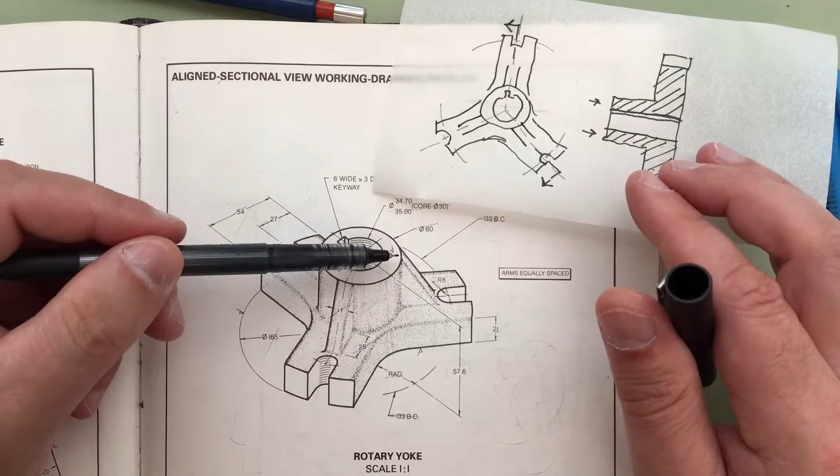Now, the next question is, we have around... no, so what? No, it's 25 here. See, there's 25 at the bottom times whatever tall.

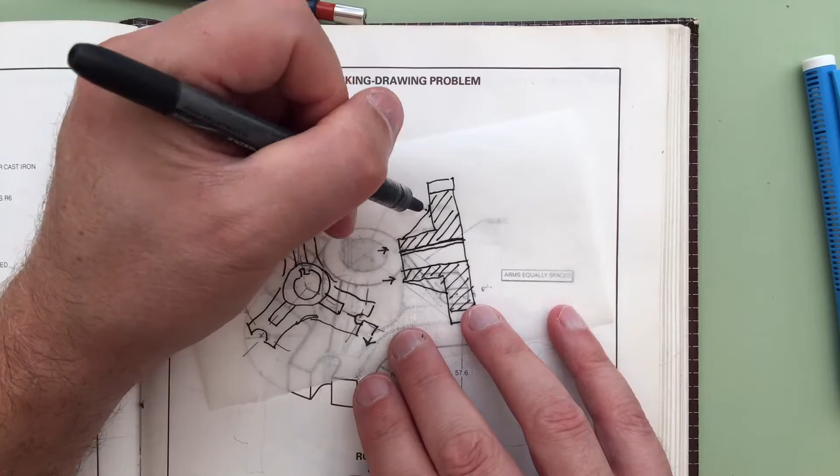Now, I'm looking at this here, and because this is a fillet, really in mechanical drawings, they would show it like you're seeing here because it's rounded at the bottom. I think most mechanical drafters, even though this is rounded at the bottom and normally you wouldn't show that rounding, they would just cap them off anyway, even though there is a round. And so technically speaking, if I've got a fillet at the bottom of this thing, I'm not going to see this line because of that fillet, right? Because it kind of makes that line disappear.

The reason we're seeing the lines on the ends of our webs is just because that's their ultimate width. So fine, in reality, of course, what this thing looks like, it's curved, and as it goes downwards, it's kind of got this rounded both across the top of it as it hits the flange and goes down, and then when you get to the bottom, it also is rounding out in all directions like it's filleting. So it makes it super smooth. So those smooth lines, you wouldn't normally see it, but it would be just too weird not to have the line at the bottom. So it's still going to be shown.

So there's another one of these tolerances here. So you just put that in as text. What do you draw it at? Draw it at 35, because you're just not going to be able to get that 34.7 to work.

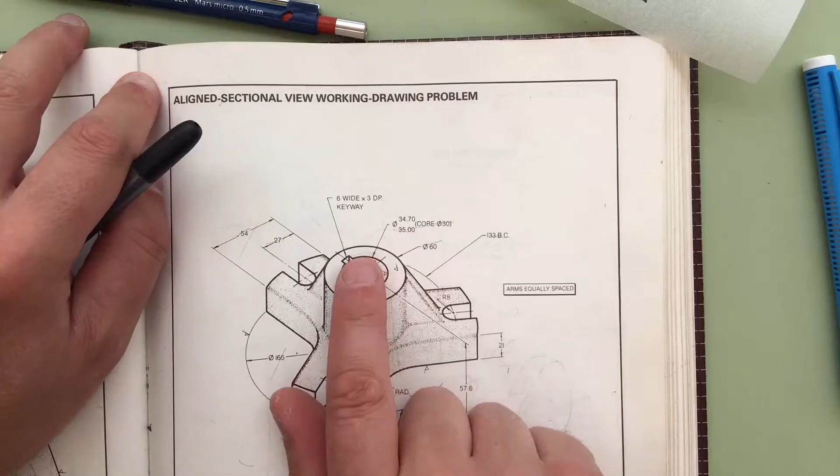Now, this has 2 parts to this. And this is something that we will catch in section. I just realized here my section here we need to discuss this. So we've got the tolerance for the drive shaft that goes into this thing. That thing is 35. Now at the bottom here, through this plate, and this is actually a really good point. I got to redraw this because I made an oops-a-daisy.

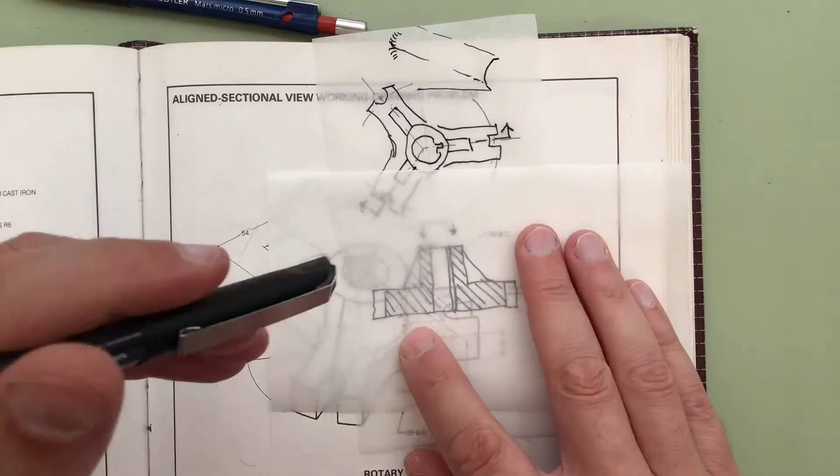Okay, so this goes to 2 parts. We've got the 30 diameter core through the bottom plate that these 3 prongs, these 3 spokes are on. And then we've got the hole through the flange. So this flange would be maybe welded on. This thing might be all cast and then drilled. So this thing might be a cast part and then it's drilled for everything it's got to do.

So it would start life out. This slot wouldn't be cut. The webs would be here. The keyway wouldn't, and the hole wouldn't, and the core in the bottom wouldn't either. So let's look at section and just see what this thing would really look like.

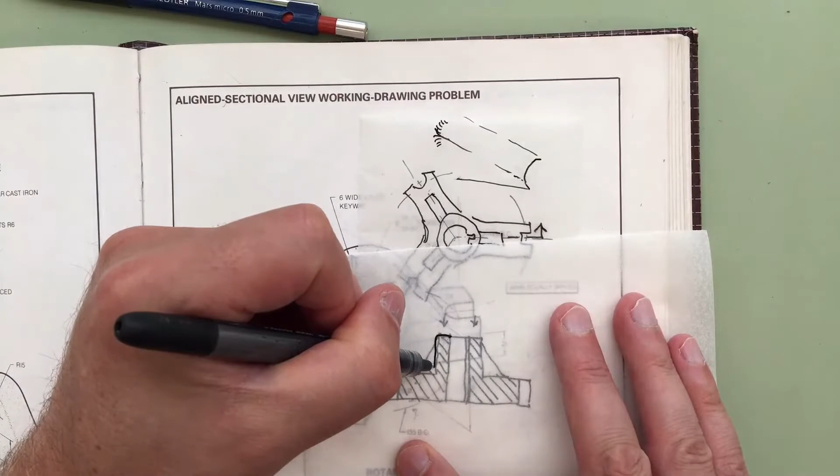So, 35 diameter hole with a core at 30. So this means that as we come down to the bottom of this thing, it actually steps over a little bit. So there's the keyway. So at the bottom here, this is 30 in diameter, and at the top, it's 35 in diameter.

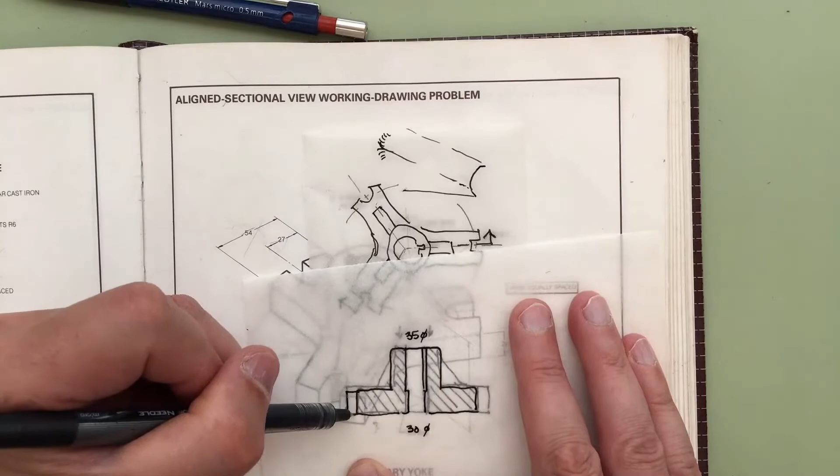So that is what we're going to see. Let me get this other piece out of the way. So there's the 30 core at the bottom, 35 at the top. Here's our webs coming down on either side, and then we will section it like this. So keyway doesn't get sectioned, and then it gets a little bit thicker as we get down to the core, like so. So that's what that is talking about here with the core.

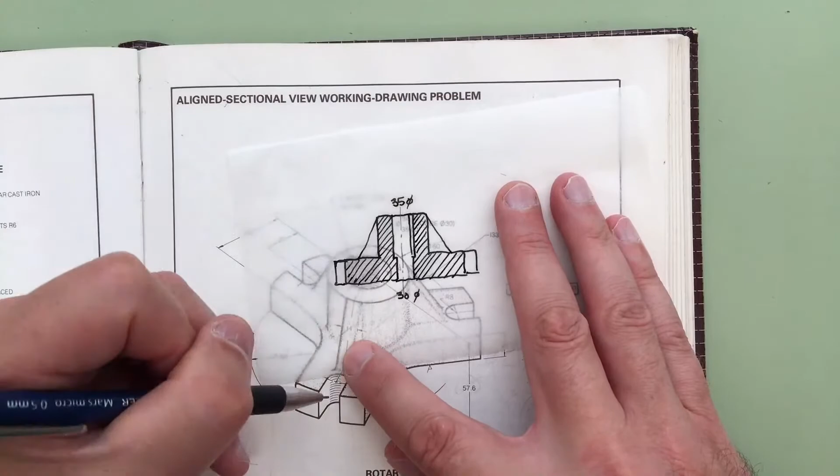Okay, then the center line down the middle here. Center line's here for the center of the bolt hole, or where the drill hole was made to make that slot. So you can have those 3 center lines like you see there.

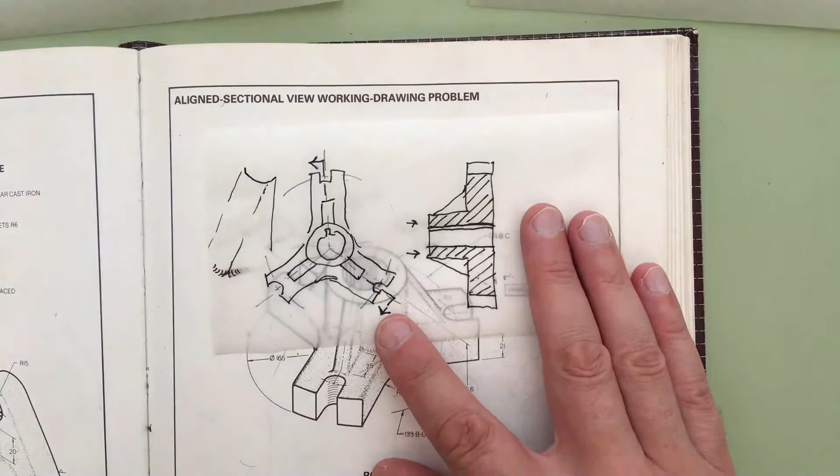Yeah, and the section is going to go through the keyway. So when you're drawing the section for the keyway, of course you want to make sure that the direction that you're drawing the section here, the keyway should be on the top of the section, and it is here. And then, I didn't even draw the keyway on the other example. So that's just another thing that you need to keep track of when you're doing your section.

So here's the way the section really should look, with the smaller hole in the bottom of it and a keyway visible with a larger hole at the top of the hub.